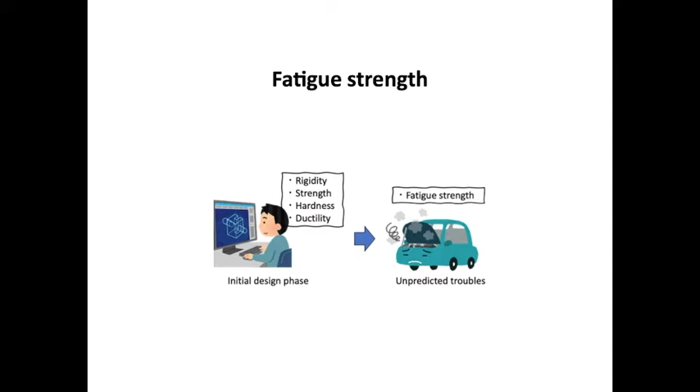Next is about fatigue strength. Repetitive stresses sometimes cause the failure of a structure, even if the stresses are within the elastic range in the stress-strain diagram. This failure is called fatigue failure, and the fatigue strength is a property to examine the phenomena of failure. Various accidents have occurred in the past due to fatigue failures.

For example, there was the JAL jumbo crash in 1985, and mechanical parts have broken under unexpected conditions in other cases. I used to be a design engineer of automotive parts, and most of my practice used to be countermeasures against fatigue failures that have occurred unexpectedly.

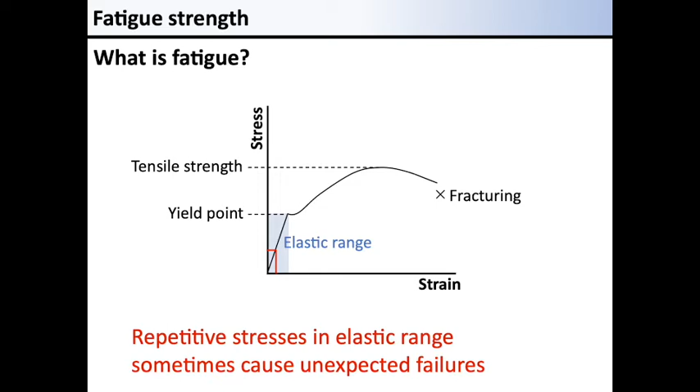So far, it has been emphasized that the key factor of a machine design is to select dimensions, shape, and materials so that materials do not exceed the yield point with respect to rigidity, strength, hardness, and ductility. Even if a machine designer believes that the design is perfect, fatigue failure sometimes causes unpredicted troubles in machines.

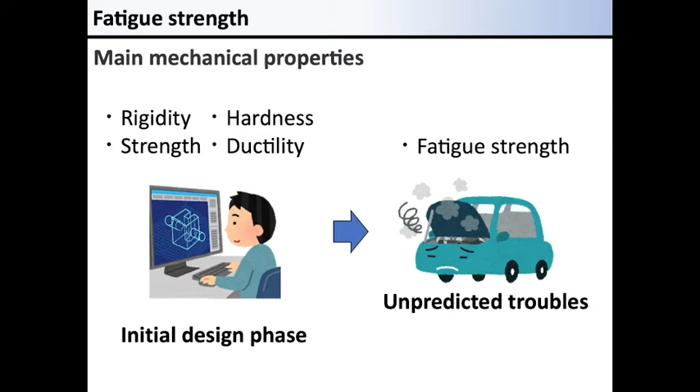Fatigue failure is a very tricky problem. If too large a safety factor is taken, the entire structure can become unnecessarily large. However, even if it does not fracture under normal use, it may unpredictably fail due to unexpected repetitive loading. Fatigue is assessed by the magnitude of load and its number of repetitions. Based on the assessment, you may design the stress applied to a mechanical part subjected to repetitive loading.

A diagram which is called the S-N diagram is used to evaluate fatigue. In the S-N diagram, the stress is taken on the y-axis. The number of repetitions of loading is taken on the x-axis. In a machine design, the main principle is to make stresses within the elastic range. I have already explained that repetitive loading may cause fatigue failure.

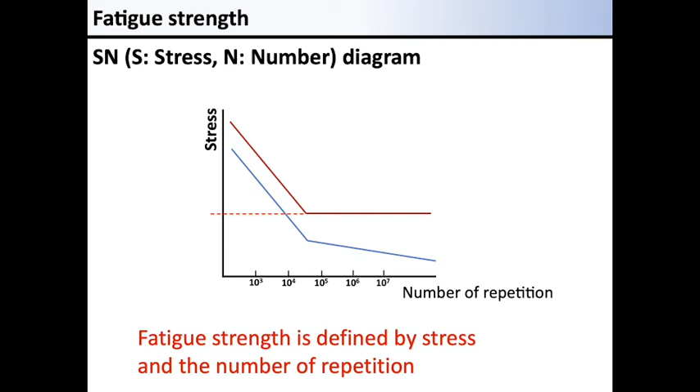Here, it is known that fatigue failure does not occur as long as the stress is below a certain magnitude. This is called the fatigue limit. In case of a part subjected to repetitive loading, the stress should be designed to be below the fatigue limit. The concept of fatigue limit is aimed at controlling fatigue.

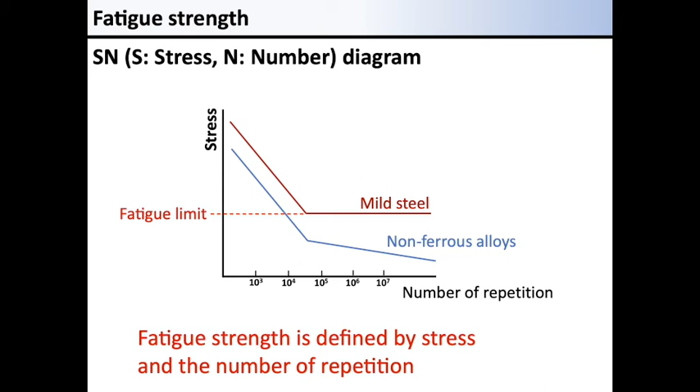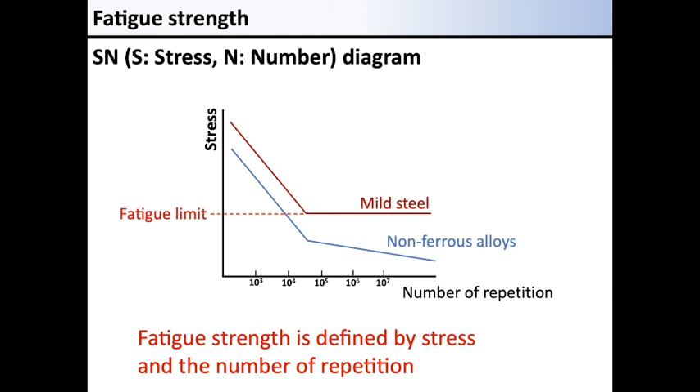In the case of mild steel, the fatigue limit clearly appears. On the other hand, in the case of non-ferrous metals such as aluminum, the fatigue limit does not clearly appear. When using non-ferrous metals, you should design the stresses so that the part withstands a sufficient number of repetitions in the operating environment.

So, what may be countermeasures against fatigue failure? Fatigue failure is a phenomenon in which small cracks progress from a defect on the surface or inside of the structure, eventually resulting in failure. From this point of view, a simple countermeasure is to reduce the number of starting points from which cracking progresses. For example, you may design a larger corner radius.

It is also important to prevent internal defects such as cracking and impurities caused in casting. Heat treatment may be implemented for a homogeneous crystalline structure and hardened surface.